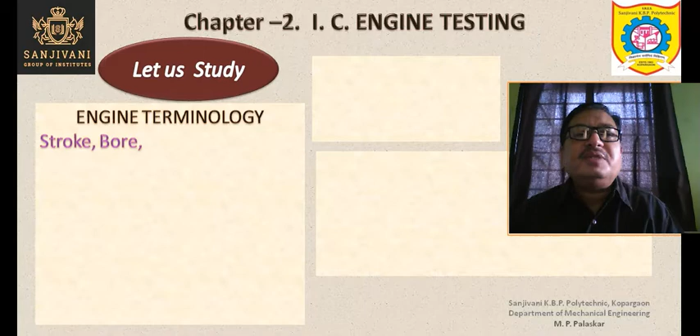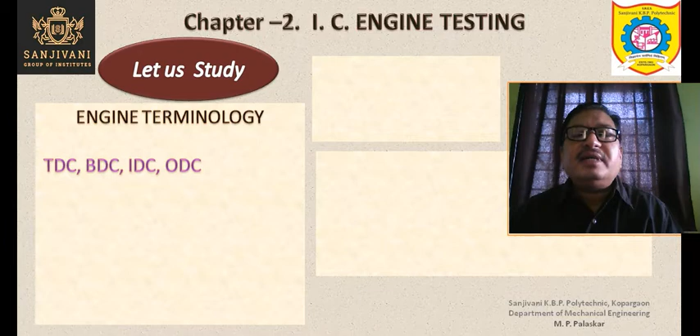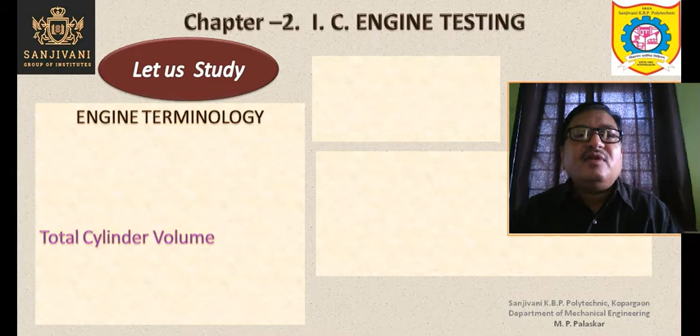We are going to start with the engine terminology. We are going to study bore and stroke in engine terminology, the definition of the stroke and the bore, then TDC, BDC, IDC and ODC - that is top dead center, bottom dead center, inner dead center, outer dead center, etc. We are going to study the piston speed, swept volume, clearance volume, total cylinder volume, compression ratio, expansion ratio, and cutoff ratio. Mean effective pressure is very important.

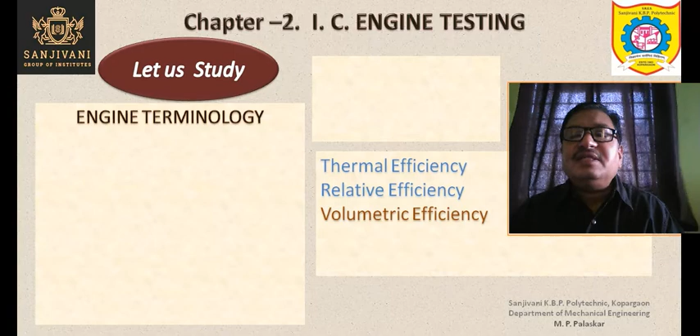We are going to find out the thermal efficiency. First we define it, and then we find out the thermal efficiency practically also. The relative efficiency we are going to define. The volumetric efficiency is also equally important, and what is of much importance is the brake specific fuel consumption of the engine. This parameter we are always defining and denoting.

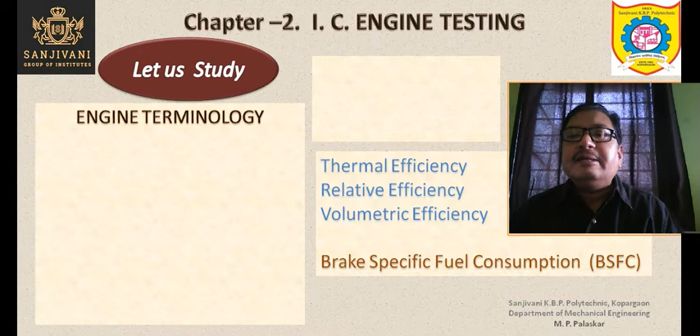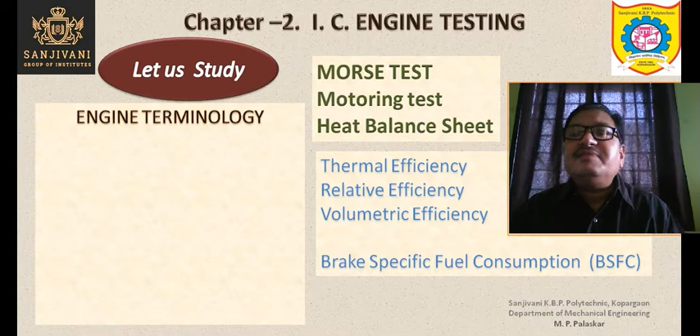We call this parameter in short as BSFC, meaning brake specific fuel consumption. In this chapter we are also going to perform the Morse test in order to find out the frictional power and the mechanical efficiency of the engine. The motoring test can also be used to find the frictional power and mechanical efficiency. Then the heat balance sheet of the engine is also important, because it gives the account of the energy supplied to the engine, the energy dissipated, and the energy obtained from the engine. So let us go ahead and start with the engine terminology.

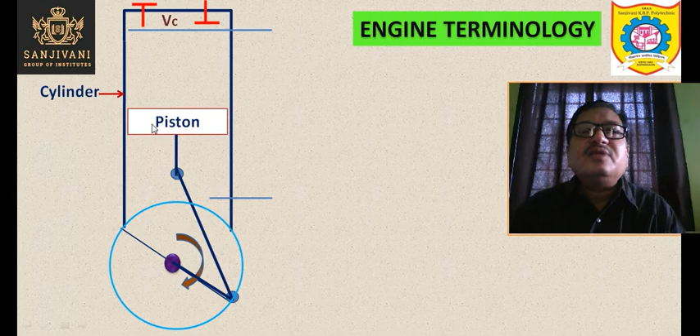So this is a simple sketch of an engine. You can see the piston and the cylinder. The cylinder is just like a pipe, cylindrical shape - the inner surface of the cylinder is cylindrical. Inside the cylinder you are having the piston; the outer surface of the piston is also cylindrical. So the piston is reciprocating inside the cylinder, which you already know.

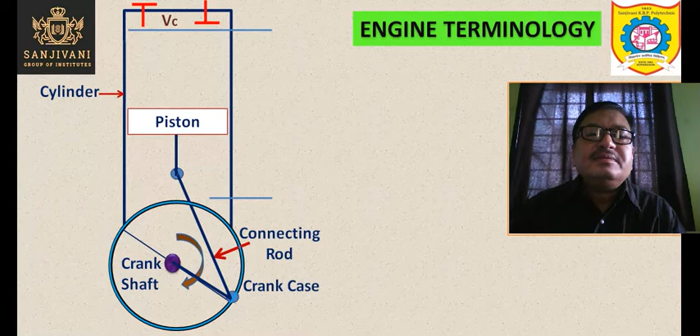So the other parts of the engine: this is the crankcase of the engine, this is the crankshaft which rotates, then this is the connecting rod, and after the connecting rod this is the crank. The crank performs complete revolution along with the crankshaft. At this point the crank is connected to the connecting rod by a pin joint or hinge joint, so the crank and connecting rod form a turning pair. Similarly, the turning pair exists between the connecting rod and the piston or sometimes the piston rod.

This is the top dead center - the extreme position of the piston at the top, towards the cylinder head. This portion is called the cylinder head, and this we have seen is the crankcase. This is a vertical engine; in a vertical engine the cylinder head is always at the top, whereas the crankcase is at the bottom. The extreme position of the piston at the top, closest to the cylinder head, is called the top dead center, TDC. In case of a horizontal engine, this position is called the inner dead center, or IDC.

So the piston is moving from the top dead center to the bottom dead center. The motion of the piston from the top dead center to the bottom dead center is called a stroke. Once again, I will show: the motion of the piston from the top dead center to the bottom dead center is called the stroke.

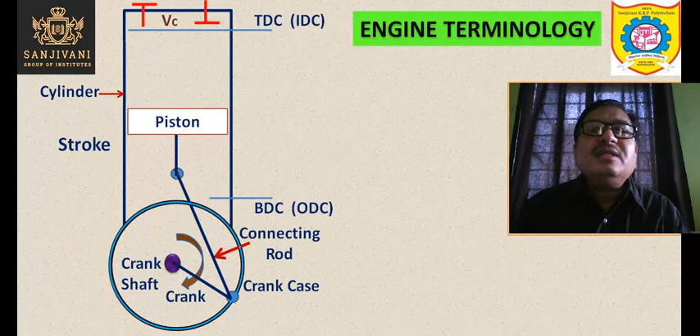The piston is also moving from the bottom dead center to the top dead center, and that is also called the stroke of the piston. So the stroke is nothing but the motion of the piston from one extreme position to the other extreme position, either from TDC to BDC or BDC to TDC. In case of a horizontal engine, stroke is the motion of the piston from IDC to ODC or ODC to IDC.

This is the stroke length, the distance covered by the piston as it moves from TDC to BDC or BDC to TDC, denoted by capital L. So the distance covered by the piston as it moves from one extreme position to the other extreme position is called the stroke length of the engine.

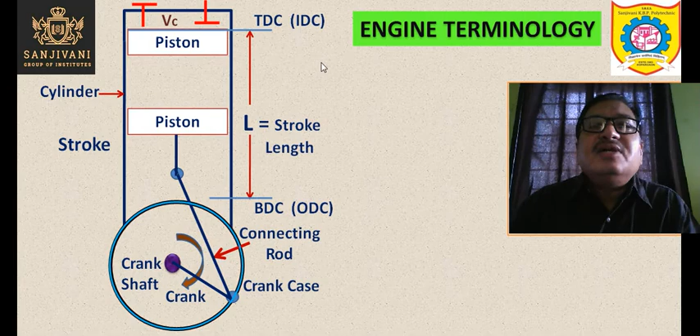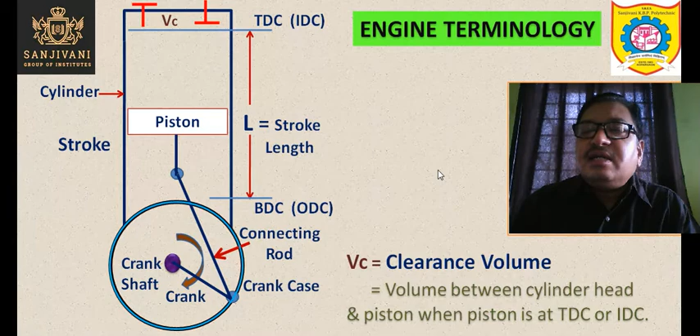The piston is now moving from the bottom dead center to the top dead center. This is the extreme position of the piston at the top, which is closest to the cylinder head. There is some gap, some clearance, some space between the cylinder head and the extreme position of the piston at the top. This space is called the clearance space, denoted by VC, the clearance volume. So VC equals the clearance volume equals the volume between the cylinder head and piston when the piston is at top dead center or inner dead center.

Let us continue the study of engine terminology. We have studied stroke. Now bore is nothing but the internal diameter of the cylinder, sometimes also called the bore diameter.

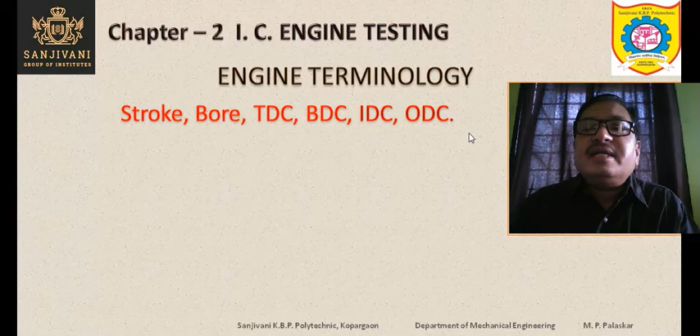So TDC is top dead center, BDC is bottom dead center, IDC is inner dead center, and ODC is outer dead center. IDC and ODC are used when the engine is horizontal.

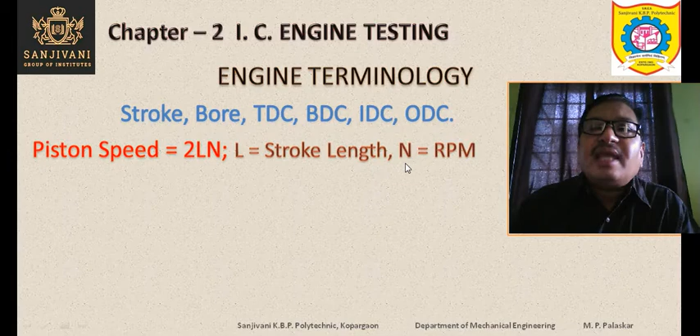The piston speed is equal to 2LN. The speed of the piston, the speed with which the piston moves from top dead center to bottom dead center, actually varies, but we can find the average speed. This is given by the equation 2L into N, where L is the stroke length and N is the RPM of the crankshaft or crank.

The swept volume of the piston or engine is the volume swept by the piston during one stroke. That is equal to the piston area multiplied by the stroke length, A into L.

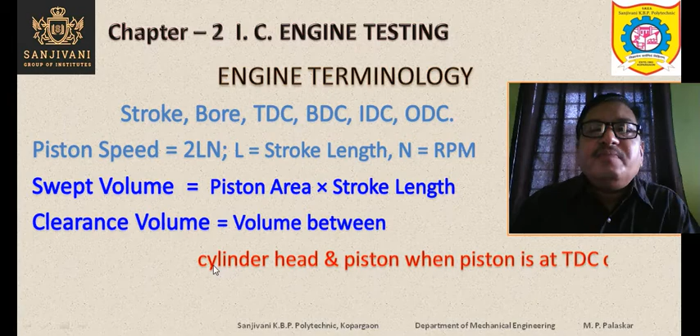The clearance volume, as we already saw, is the volume between the cylinder head and piston when the piston is at TDC or IDC. Total cylinder volume equals clearance volume plus swept volume, so the total volume of the cylinder is the sum of the clearance volume and the swept volume.

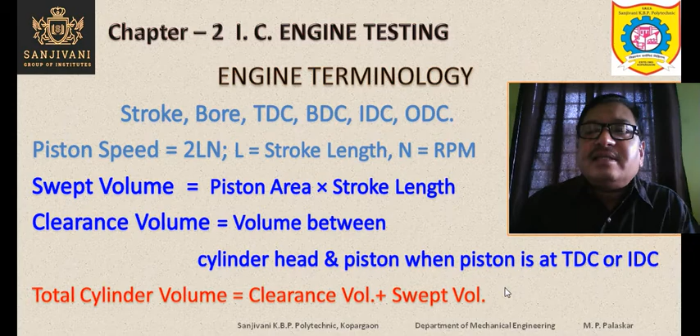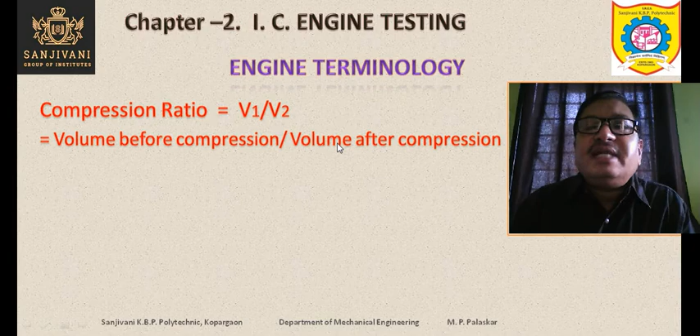Now we define the compression ratio. Compression ratio is the volume before compression divided by the volume after compression, V1 upon V2. V1 is the volume before compression, V2 is the volume after compression. After compression the volume is reduced, so V2 is less than V1, since before compression the volume is larger. So this compression ratio will be greater than 1 if compression takes place.

Now the expansion ratio is the ratio of the volume after expansion to the volume before expansion. The volume after expansion will be larger and the volume before expansion will be smaller, so the expansion ratio is also greater than 1.

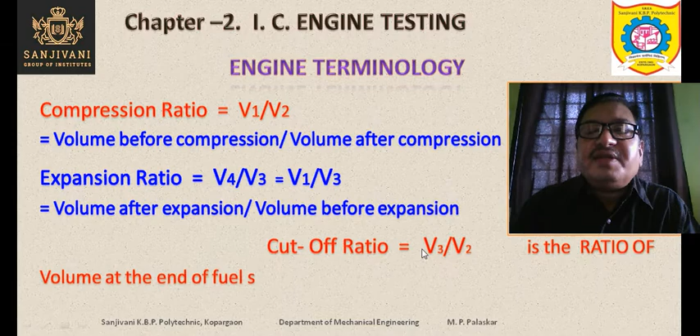These definitions we have already studied while covering the power cycles, the Otto cycle and diesel cycle. While studying the diesel cycle, we also studied the cutoff ratio. Cutoff ratio is the ratio of the volume at the end of fuel supply to the volume at the beginning of fuel supply, V3 upon V2, where V3 is the volume at the end of fuel supply and V2 is the volume at the beginning of fuel supply.

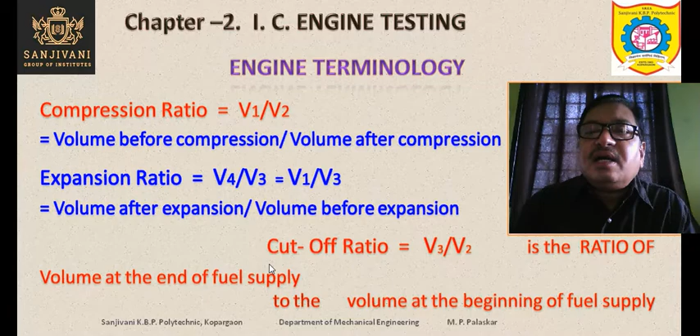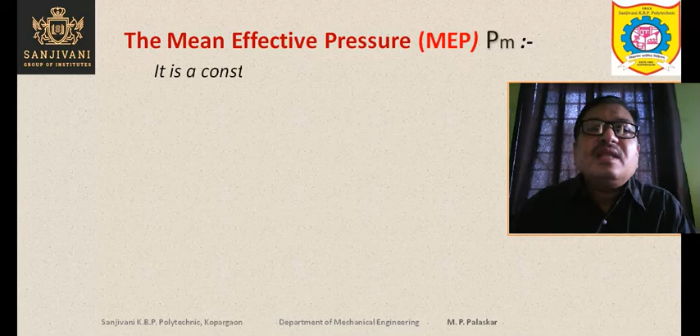Now we define the important term, the mean effective pressure. In IC engines this term is very important, especially when solving numericals. Mean effective pressure is the constant net fictitious pressure that, if it operated on the piston during the entire cycle, actually the pressure acting on the piston varies continuously during the cycle, but we imagine some constant net pressure, which is an imaginary or fictitious pressure since practically the pressure is varying.

So if we imagine some pressure which is the net, constant pressure, and if that pressure acts on the piston during the entire cycle, it would produce the same amount of net work as that produced by the actual varying pressure in the actual cycle, even though that actual pressure is varying.

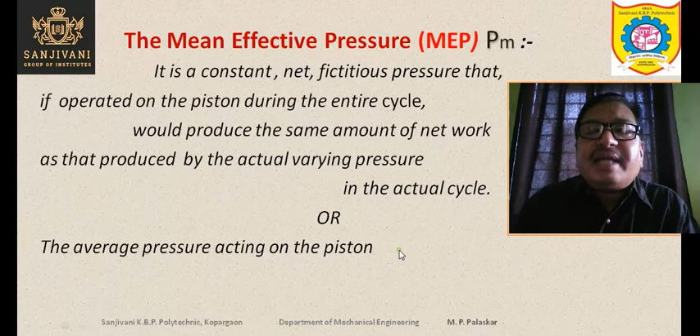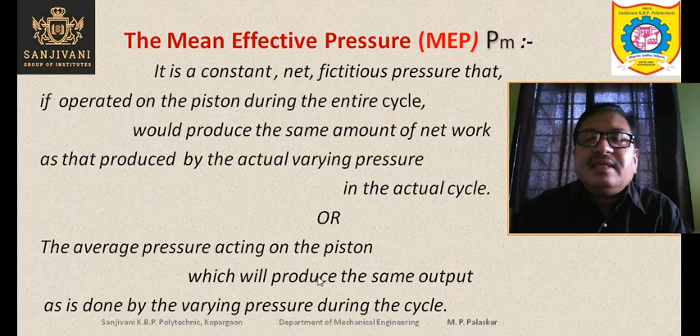Now if you imagine some constant net pressure acting on the piston throughout the cycle, and that would produce the same amount of net work, that pressure is called the mean effective pressure. So mean effective pressure is, in simple words, the average pressure acting on the piston which will produce the same output as the varying pressure during the cycle. The power output and net work obtained during one cycle will be the same, but the pressure is constant. That constant pressure is called the mean effective pressure, even though actually the pressure is varying and giving some power output.

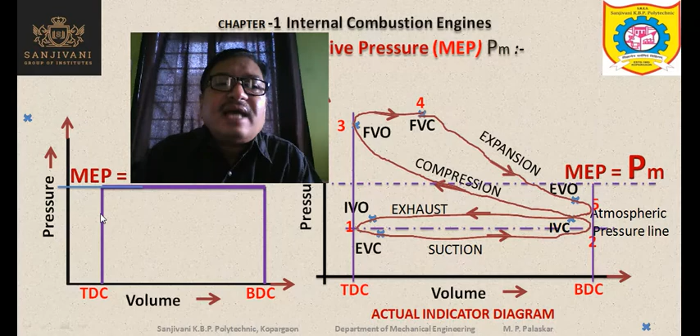So instead of this varying pressure, if we try to have a constant pressure such that the area below this line is equal to the area below the curve. This is the positive loop and this is the negative loop, so positive loop minus negative loop is the net area, and this area represents the net work done during one cycle. If both areas are the same, then this height represents the mean effective pressure.

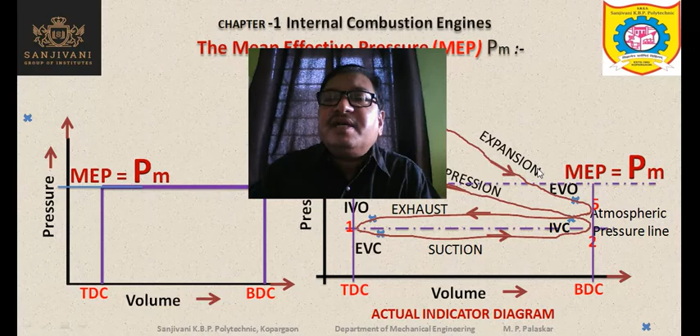Let us study this with the help of one more figure, another actual indicator diagram. This is the atmospheric pressure line, and the real pressure is continuously varying. During the suction stroke, the pressure is lower than atmospheric, then it increases during the compression stroke. Here heat is supplied at almost constant pressure, then expansion occurs during which the pressure is reduced, and then during the exhaust stroke the pressure is slightly above atmospheric.

So this pressure is continuously varying, but it gives some mechanical work output during one cycle. That work output will be the same if the mean effective pressure is constant. So instead of this varying pressure, we try to have this constant value of pressure, the mean effective pressure, denoted PM or MEP.

So if this is the value, then this is the area obtained between the constant pressure line and between the top dead center and bottom dead center limits. This area will be equal to the area below the varying pressure curve, so the amount of work will be the same. That means this area equals the area between these curves, this varying pressure curve and this constant pressure line, so the amount of net work is also the same.

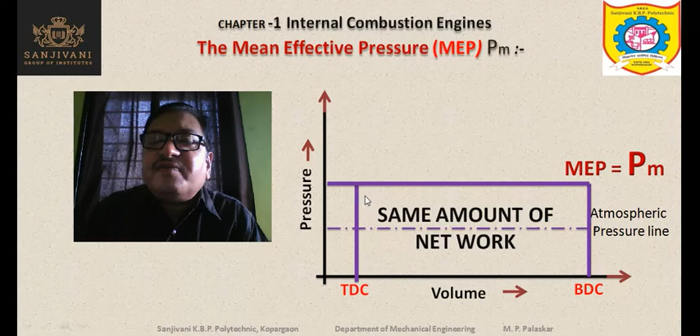Of course this is an imaginary thing, that we try to make the pressure constant and obtain the same amount of work, because the area of this rectangle is equal to the area occupied by the curve. This curve's area minus this area is the net area representing the work done, and this is nothing but the mean effective pressure.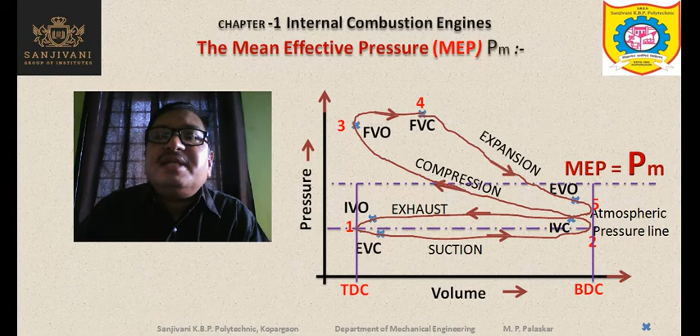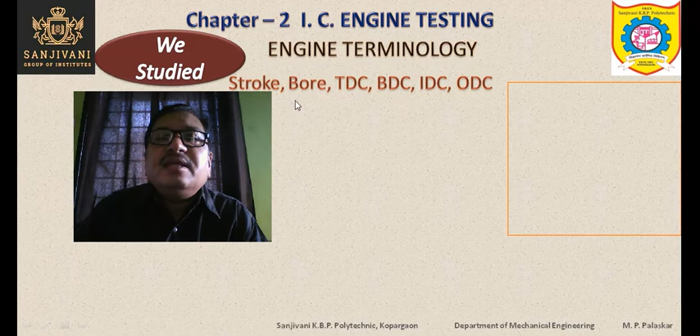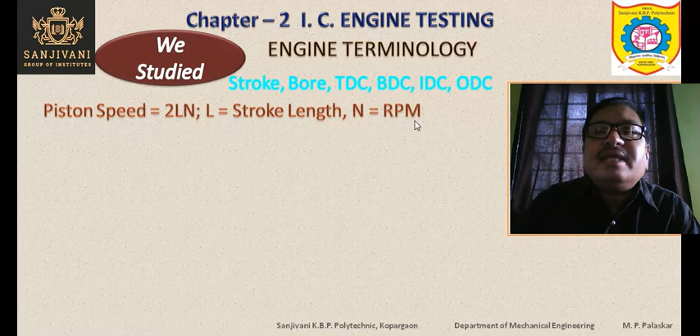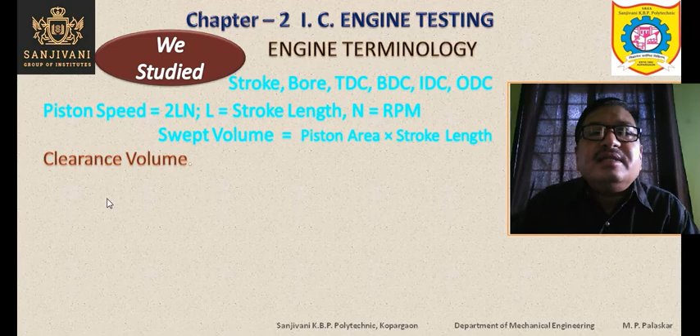So today we have studied stroke, bore, top dead center, bottom dead center, inner dead center, outer dead center. At the same time we have also studied piston speed and stroke length. Piston speed equals 2LN, where L is the stroke length and N is the RPM. Let us quickly revise what we have studied: swept volume equals piston area into stroke length, and clearance volume, total cylinder volume we have studied.

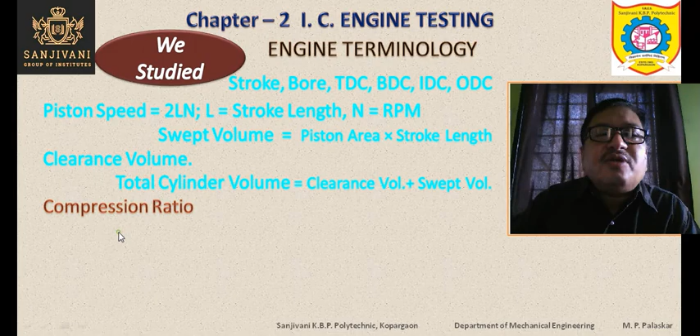So the clearance volume is nothing but the volume of the cylinder above the piston when the piston is at the top dead center, the extreme position. That is the clearance volume. Then total cylinder volume equals clearance volume plus swept volume. Then we have studied compression ratio, expansion ratio, cutoff ratio, and mean effective pressure. Mathematically, mean effective pressure is the ratio of the work done per cycle to the stroke volume.